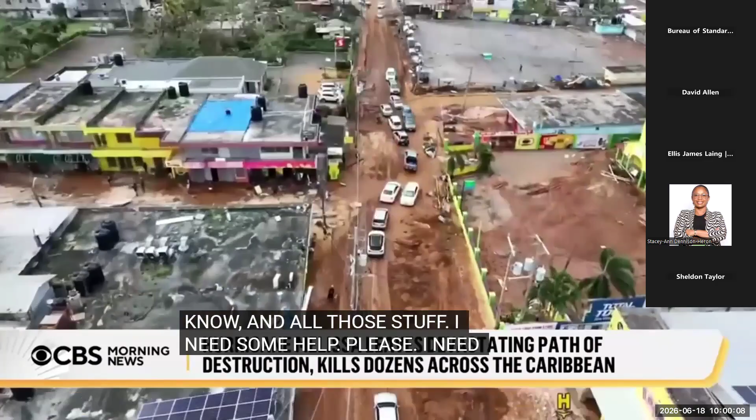Similar scenes playing out in eastern Cuba. People there combing through what's left after hurricane-force winds reduced homes and buildings to rubble, trying to salvage what they can, even in communities still completely flooded.

Back in Jamaica, we traveled to Santa Cruz, about 2 hours west of Kingston. The town's one working front-end loader shoved mud off the only major roadway connecting this community to hard-hit Black River.

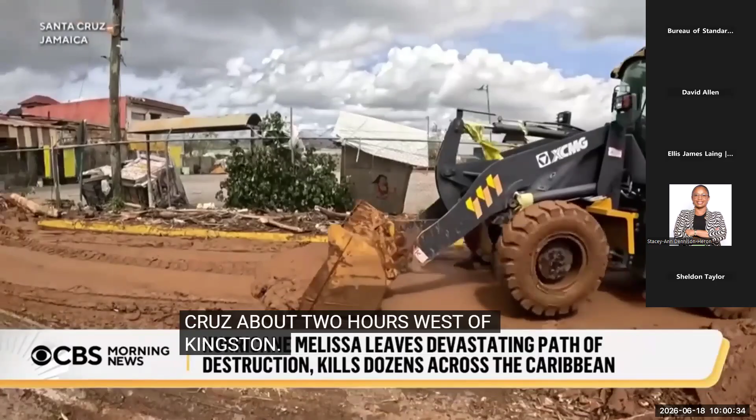Local politician Delroy Slowly: I drove around, and it's really a horrible thing. This is the strongest storm we've ever seen. But in all of it, we still have to give God thanks for it. It could have been worse.

How could this have been worse? Lives, many lives could have been lost. You see, properties can be replaced, but it's one life you have.

At St. Elizabeth Technical High School, the students and teachers sheltered in one of the concrete buildings on campus, but this is one of their classrooms. The roof ripped off in the winds, and the walls are all piled on top of the desks and chairs where students would have been sitting on a normal day.

While the school is in recovery mode for now, Principal Keith Wellington is determined to give his students the support they need. It's not even just about school and getting to do their exams, but the period of socialization, what they go through when they're at school with their friends. It helps them mentally, so it's important that we get back to some level of normalcy.

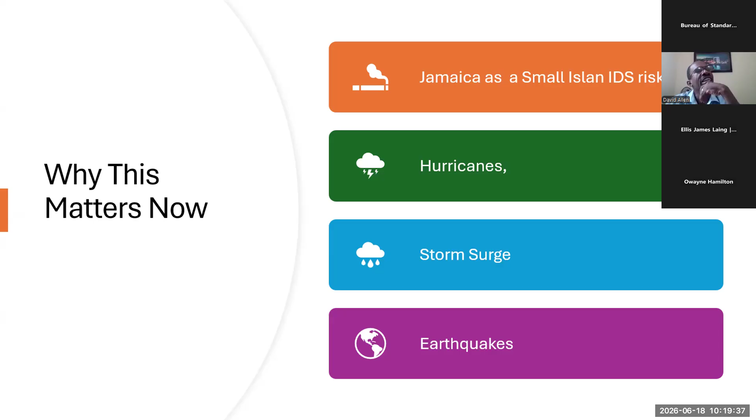But primarily, one of the things we face, especially on the heel of Melissa, is hurricanes. Hurricanes happen, but those of us in building practice know that though earthquakes are significant in our Jamaican space, the way we build, especially given concrete structures and low-rise concrete structures, means these structures survive pretty well under earthquakes. More than 90% of construction in the country is residential, and mostly not more than two stories high.

We have a practice in Jamaica of using a lot of concrete, maybe a lot of steel—we'll come to whether that amount of steel is necessary—but we're pretty good at using a lot of concrete. What we find is that in many cases, the structures that fail are structures that are not engineered, or have not had the input of design professionals.

So we have cost of compliance versus non-compliance. Compliance costs include proper construction, not necessarily more costly construction. Looking at compliance costs: upfront monetary outlays, a permit maybe $135 per square meter, give or take based on what the council charges. The design professional fee may be somewhere between 7 and 15% of construction costs. And if you're using high-grade material to meet standard, you want to resist winds of up to 150 miles per hour. In fact, today we have to be designing closer to 200 miles per hour.

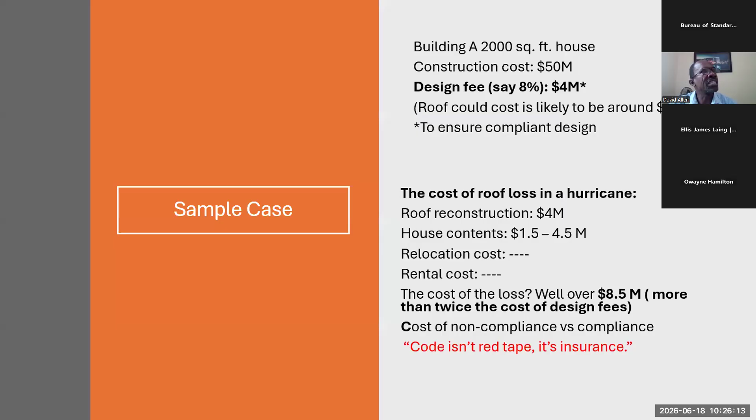And we see the rafters in place, so we know the rafters remain because they were strapped, by and large. So what is then missing? I wanted to emphasize this because in the Jamaican case, it's not so much that you have the rafters not being held down or the wall plates not being held down, because we have learned a lot from Gilbert.

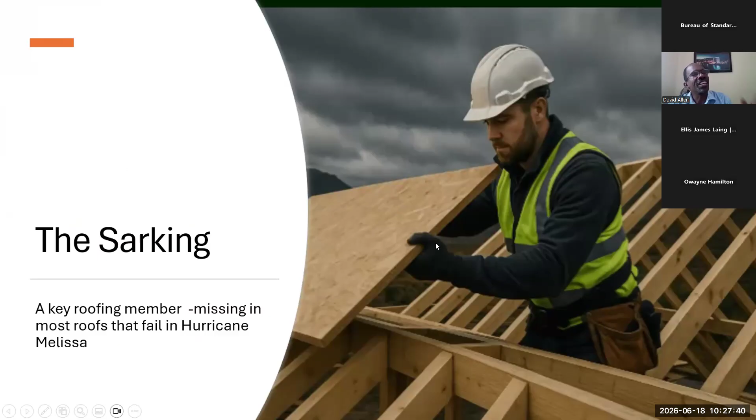And this is what the sarking will look like - not probably as smooth as this, but in the Jamaican context we use things we call tongue and groove boarding or T111, sheets that are placed atop the rafters, and then on top of that we put your purlins and then the roof sheet.

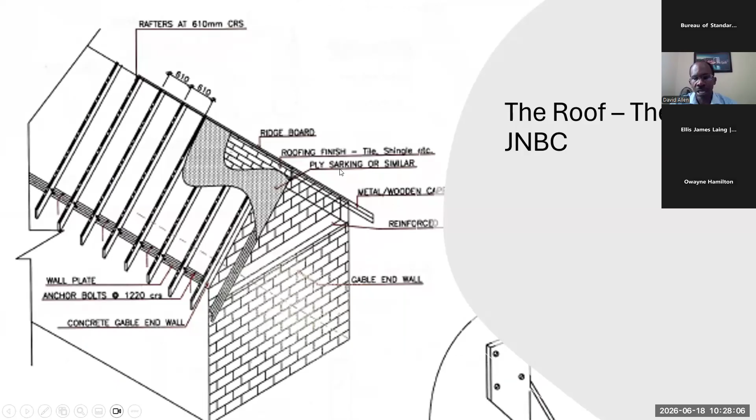So what's happening is that for a situation in Jamaica, from my findings, when you have that absent member called sarking, which is part of the code - so it's not something new you're putting in, it's already there. This is a snapshot from the small building residential code. It shows you this thing called ply sarking or similar, which is not done, clearly because it's going to cost some money.

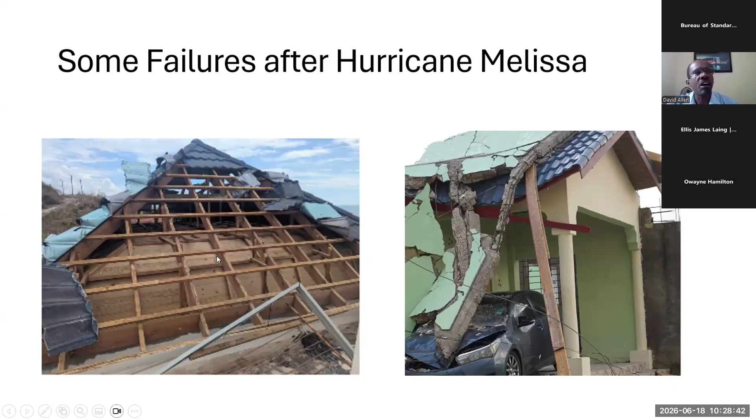But if that member were in place, you'll find that the sheeting would have a proper base to go on - yes, because it goes normally on top of these purlins. And the exposure to damage of your structure would not be as significant, because wind would not blow straight into the house, and water coming in during the hurricane event will not get in. Therefore your roof by and large will survive, even if you have stripping of the roof sheeting. So the structural detail is important.

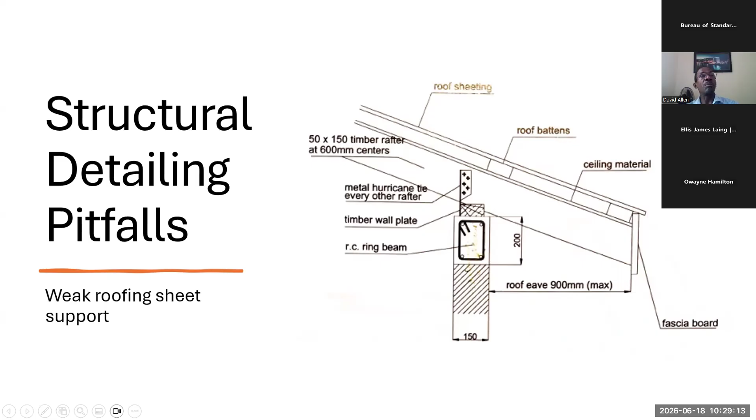A weak roofing sheet support is what I'm finding to be a major issue in the structure of roofs. Many of you may already know this when you look at the ring beam on top, the wall plate on top of that, the hurricane straps. But that member that normally goes just before the roof sheet, which is called a sarking, is in many cases, and in almost all the cases I've seen, absent. So applying the Jamaica National Building Code best practices is important.

I'm trying to keep with time as well. You want to follow a particular process, right?

The design is important. Under the Building Act, you may only be required to use an engineer when the structure is above 3,000 square feet, or roughly 300 square meters. So the structure may not have a design professional, but it's advisable. In many cases the councils have that duty as well, looking at the building and saying, no, it's still less than 3,000, but in our view this is going to need one. So practitioners must look for reasons, not undue ones, which will require the design professional to step in.

So you move from design, to the permit, to the construction phase, which is where you have quite a bit of inspection occurring. We want to suggest that some inspection happen at the roof level, because from my understanding, that's not where the municipalities typically come in. They want to see that the trench is dug and the reinforcements are put in place before the concrete is cast. They will come and look at the concrete roof, but I'm not sure what happens with timber roof situations, and I could be corrected on what level of scrutiny occurs there.

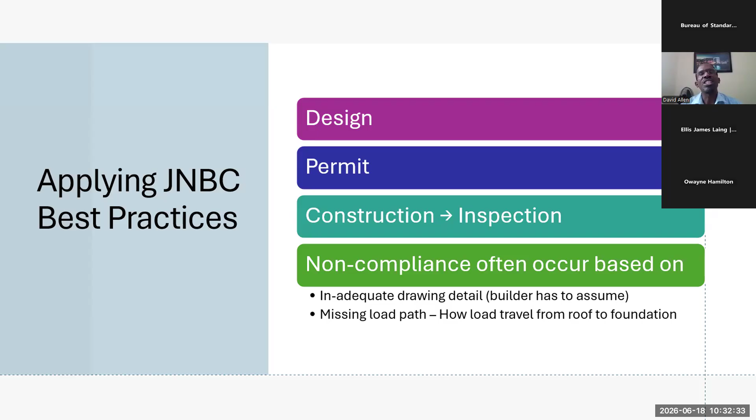Missing load path - when we talk about that, we mean the whole load transfer traveling from the roof to the foundation, and when we say missing, there are gaps. So the connections are important: the connection of the roof sheet to the purlins, the purlins to the rafters, the sarking to the rafters, and all those connections going down, so that the roof is connected to the wall and pinned down properly to the foundations.

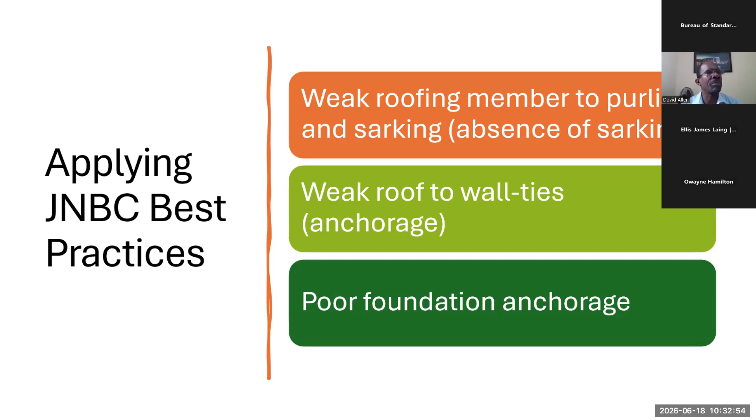All of those connection areas must be solid to avoid failure. So we start applying best practices. We need to address weak roof members - we're finding the absence of sarking. We have weak wall ties, though we are improving quite a bit in that area, and poor foundation anchorage, though I won't get into that detail.

What I want to end with is a kind of checklist for engineers, builders, and inspectors. It's important to ensure the load path is continuous, meaning there are no gaps, no breaks. In past times we may have found a gap where the rafter meets the wall plate, so we use hurricane straps to close that loop. But the loop we're not closing is the roofing sheet to the purlins, because the purlins, the sarking, are really basically absent.

We must ensure that the details match the drawing - this applies to builders, owners, and whoever is in charge of the construction process. If it's not in the drawing, don't build it. There's a common failure where contractors act as 'value engineers,' saying the engineer doesn't know what they're doing, that this is too much steel.

Or we can put that there, or stretch that a little bit, because in their experience they have built buildings that are okay, since they haven't heard that they collapse. So they find a way to cut down the cost. You tell the contractor, we want a 6-inch slab, can we go down to 5-inch, or want an 8-inch slab? They say, no man, this is foolishness, 8-inch of slab can't work. We will put it down to 6, and we save a lot of money. That's about a quarter of the whole cost already, or somewhere about there.

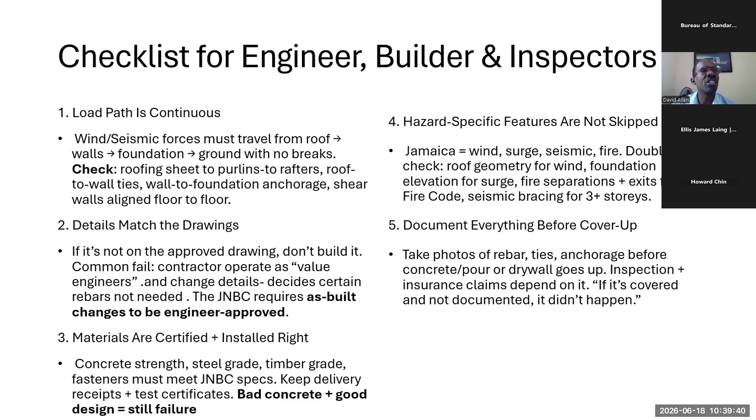Sometimes it's almost impossible to determine what was done before. So you really want to track the progress of the construction, whether it be inspectors, builders, engineers, or your own construction. As the owner, employer, or developer, you want to track the process. Also, not only to verify, but to also prove that what is built is according to plan and design, and therefore it is good for everybody to be assured of resilience. I'll stop right there, thank you.

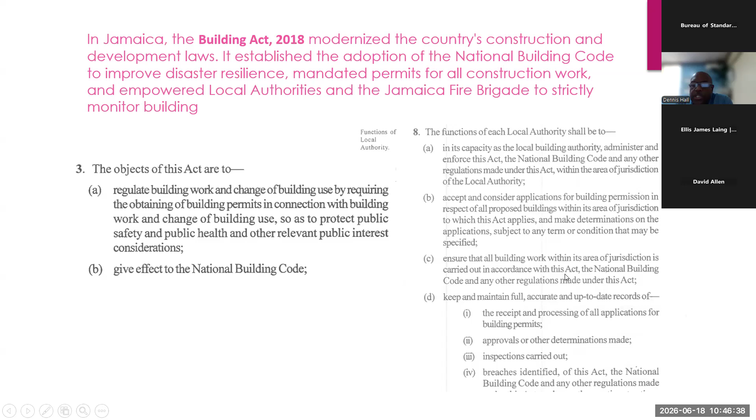Section 8 spoke about functions of each local authority, in its capacity as a local building authority, to administer and enforce this Act, the National Building Code, and any other regulation made under this Act within the area of jurisdiction of the local authority. This includes accepting and considering applications for building permission in respect of all proposed buildings within the jurisdiction, and ensuring building work within its area of jurisdiction is carried out in accordance with the Building Act. We can go on.

I'm just going to browse through some of the sections. So what is building work? Some persons feel that if they are doing an addition inside the house, or doing it within one floor, they don't need a permit. Well, this is saying something different. Building work means the design, construction, erection, alteration, repair, extension, modification, demolition, or removal of a building, and all activities relating thereto. So you really don't have an excuse not to submit a plan.

It says building means a domestic building, a public building, a building of a warehouse class, and any other physical structure, whether temporary or not. I'm going to emphasize temporary, because the gentleman I mentioned earlier did say his structure was just temporary. So right here we're seeing clearly that you need a permit for any part of the structure and any architectural or engineering product or work erected or constructed on, over, or under land or the sea, or other body of water. That simply means if you're going to excavate, you're going to need a permit. If you're going to go above the land, suspended the building, you're also going to need a permit.

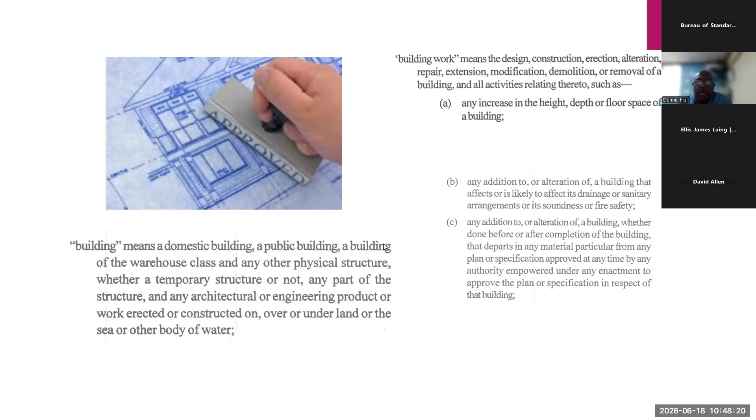I'm running up to Section 17 of the Act. A person shall not carry out building works unless a building permit in respect of the building work has been issued to him. I think that is straightforward. And part B spoke about, where applicable, a planning permit having been issued to him under the TCPA, that is by NEPA. So it's clear right here that a building permit is critical.

Section 18 spoke about a person who proposes to carry out building work shall apply in the prescribed form and manner to the local authority. If you're unaware, what we have at the local authorities, KSAC including the other parishes, are application forms that you are required to fill out with some other statutory documentation - titles, survey ID report, and property taxes - that you will need to supply us with when you're applying for a building permit.

Section 28, the local authority may suspend a building permit, and it tells you why we may suspend it: if the permit holder has failed to pay any fee or other charge required by this Act, the National Building Code, or any other regulation, or the permit holder is in breach of any provision of this Act. So this is telling you that even though you have a permit, we can also rescind it if necessary - that is, if you breach any form of the permit, if you are building in contravention of what you got approval for.

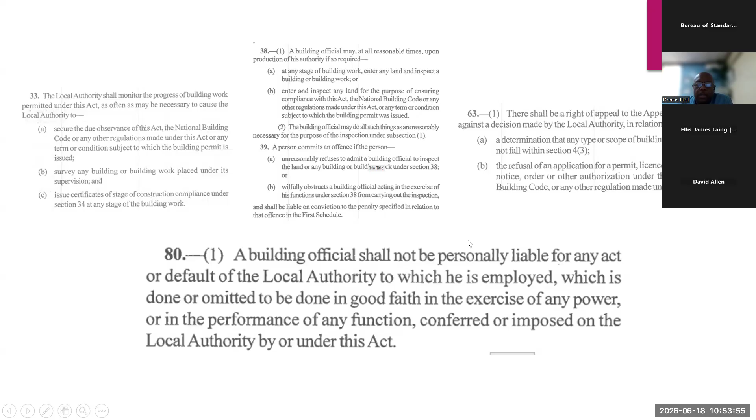I'll end the regulation aspect with Section 80 of the Act: a building official shall not be personally liable for any act or default of the local authority to which he is employed, which is done or omitted in good faith in the exercise of any power. So this is just saying we are human and might make a mistake, and we're not totally liable if we can resolve the issue through the same tribunal I mentioned.

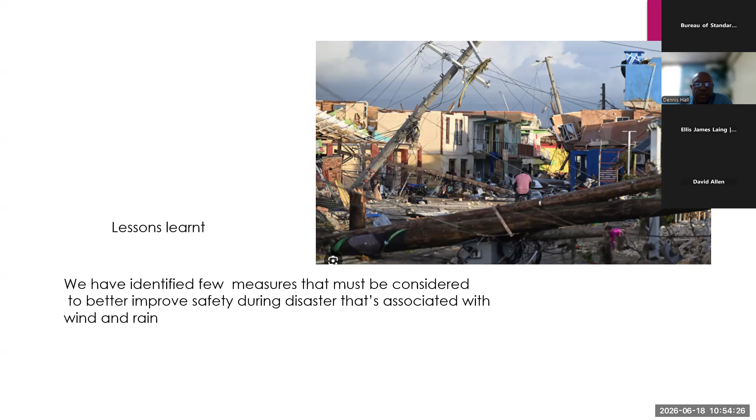So I've dealt with a bit of the regulation in the first part, and now I'm going to look at some of the lessons learned and what we can do to make buildings safer. We've identified a few issues—Mr. Allen had gone through foundations, walls, and roof, and we believe he is right on point.

One of the first things we want to look at is buildings in low-lying areas and the floor level. The building code will tell you that you can go a minimum of 150 millimeters above the grade.

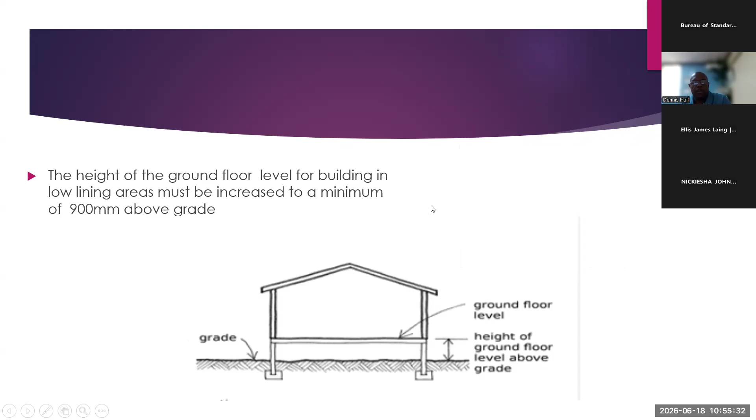But if you are in a low-lying area, we are definitely going to recommend that you go a minimum of 900 millimeters above the grade. In areas in Kingston like New Haven and other areas close to the seaside, we recommend a minimum of 900 millimeters, which provides a level of retention time, hoping the water will subside and recede, giving them a little more space or time to stay in the dwelling.

The other thing I want to look at is the roof. Mr. Allen spoke about this and the socking. But what I believe is a type of disaster—I'll call it that for the purpose of discussion—is termite infestation. We have looked at flooding, wind, and other types of disasters, but we have not looked at termites.

Mr. Allen spoke about the hold-down bolt on the wall plate, and I'm identifying this on the screen. This is the wall plate here, and the hold-down bolt is normally placed every 24 or 36 inches, about 900 millimeters. Now, if termites get into the board, into the wall plate, and destroy it, whenever the wind comes you won't have a roof, because the wall plate is what really anchors the rafters.

And so often, whenever we cut the wall plate or any timber at all, the timbers are normally treated, but if you cut the timber you expose the end of it. So you'll need to retreat that area—cutting the wall plate and leaving it exposes it to termites.

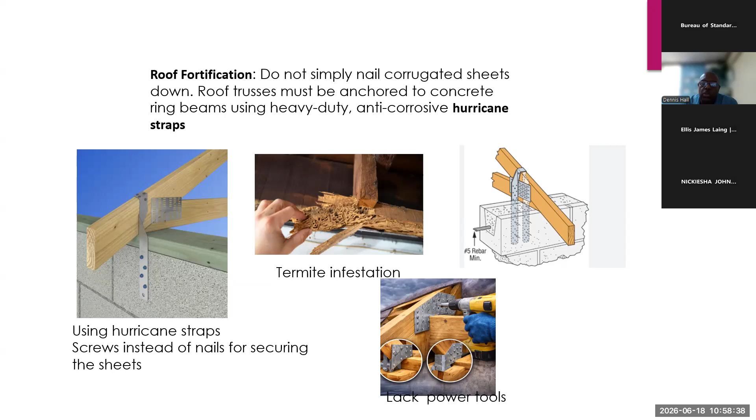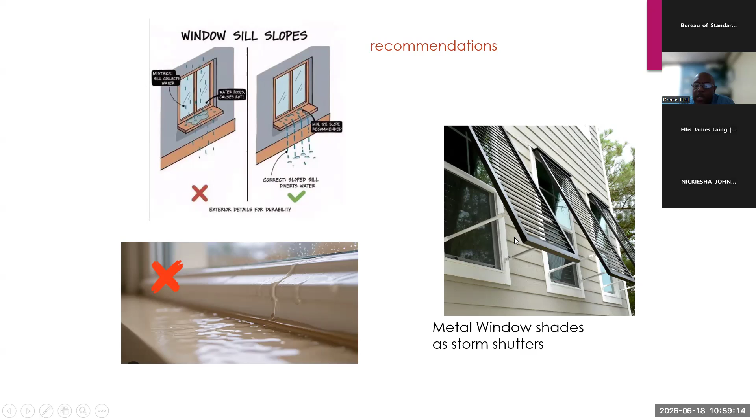Just two slides to go. I also want to look at window sills, where a lot of buildings, especially where the sill of the window is not properly designed, water can get underneath the sill, pass the sealant, and get inside. So we're recommending that they modify the sill somehow to get the water out. We're also recommending the use of metal window shades, which can serve as window shutters.

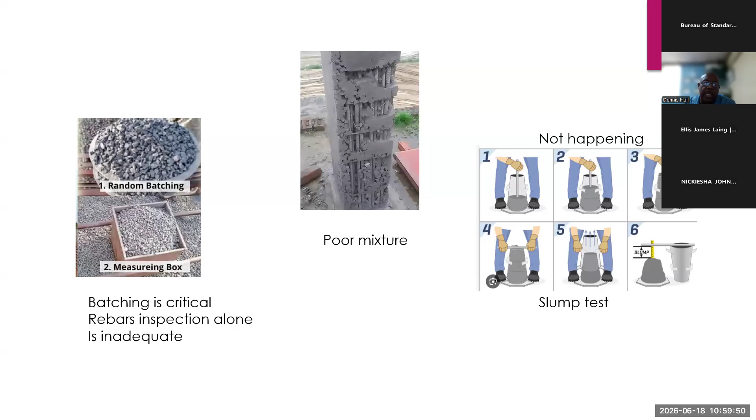And finally, critical to the industry, the batching - we spoke about that earlier - where we're making the concrete soupy, and we're not seeing slump tests being done on many sites. There are times when we end up with a lot of honeycombing that can result from poor mixtures as well, and no vibration. So we believe that batching is critical, and that's something we need to play a more pivotal role in for the built industry.

And that's the end of my presentation.

Mr. Hall, thank you very much for bringing some of those things to the fore. An important point you've shared is that so many contractors come to the fore, sometimes in the face of disaster, and in the absence of technical competence in areas, some people just assume the role. And some of these persons now need to be brought into the fold. So thank you very much for that presentation.

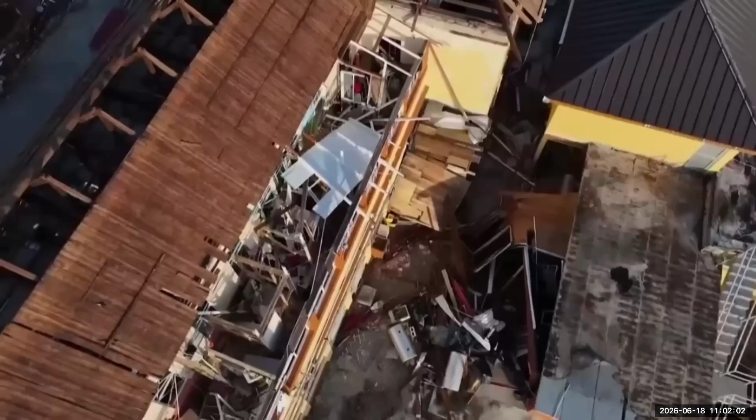It's crazy. The town's hospital had part of its roof peeled off by the storm. It is still just functioning, staff having done their best to keep their patients safe. We had to carry them to the top floor, which essentially caved in, so we had to move them back to the ground floor. In the accident and emergency area, it started flooding, so we had to be there pushing out the water.

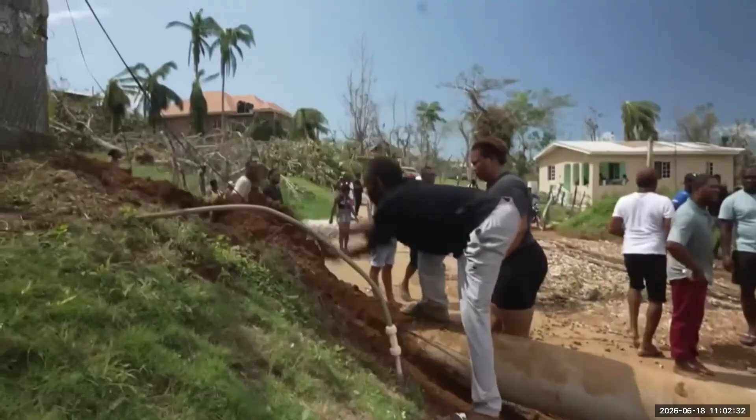No way forward? Just getting to the areas worst hit is an effort in itself. More than 100 roads blocked, communications hit hard. The fear is that the death toll will rise further as authorities reach more cut-off areas.

In Santa Cruz, inland from Black River, Sonia is doing what little she can to recover her livelihood, drying out storm-damaged stock from her shop. But the roof is missing, and she doesn't have the money to get it replaced.

I feel cast down, discouraged, like I would have just given it up. But I still doing what I can do. I don't know, I'm just trying.

It's terrible, it's terrible, everything gone. People here are used to the ravages of hurricane season, but those hurricanes are now being fueled by a warming Caribbean Sea. As Jamaicans start to recover from the strongest storm in their country's history, the fear is they may not have to wait too long for one stronger still.

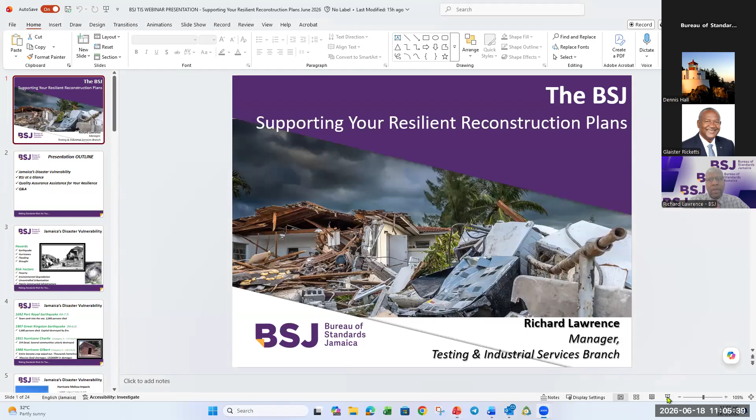Thank you very much, Ellis. Good morning, everyone. You have heard the requirements of the building code. You have heard the requirements of the municipal authority, and those are mandatory requirements. But how do you meet them? That is where the Bureau of Standards comes into play. I'm here to share with you what we do to support you in recovering and being resilient.

So in my presentation today, I'm going to look at the vulnerability that Jamaica has for disaster, the Bureau at a glance, and our quality assurance assistance that we have for your resilience.

Now, Jamaica is an island affected by numerous disasters: earthquakes, hurricanes, flooding, drought, and it is compounded by the fact of large areas of poverty. There's environmental degradation, movement to urban areas, and as we heard from the two previous speakers, some poorly constructed infrastructure. Some of it is through squatting.

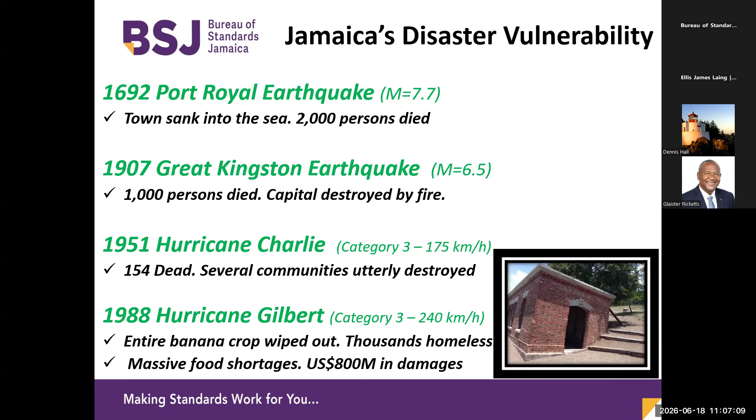And over time, we have seen some significant disasters affecting Jamaica: the Port Royal earthquake back in 1692, the Kingston earthquake in 1907 — I have to say that because some of us are born in the 1900s — and Hurricane Gilbert in '88 that cost us over $800 million in damages.

And in recent time, we had Hurricane Melissa in October last year that affected us to the tune of over $8.8 billion, or 41% of our GDP. So Jamaica is no stranger to disaster, and it's important that we are resilient.

Resilience is not an option. With all of these disasters over the years, and now being in the hurricane season for 2026, what do we do to prepare going forward? My suggestion: partner with the Bureau of Standards Jamaica. And why do I say partner? Because we are here to help.

This is a major news alert. Breaking news, breaking news: the BSJ is not a regulator. If you knew this, put a 1 in the chat — that the Bureau of Standards Jamaica is no longer a regulator. Let me see the ones in the chat. Yes, we're not a regulator. We were, but we're no longer.

What we do is facilitate trade, and we assist in business development through our core functions: conformity assessment, which includes certification, sampling, and testing. We develop standards and codes of practice like the building code. And we also offer services in metrology, industrial and scientific, which includes calibration.

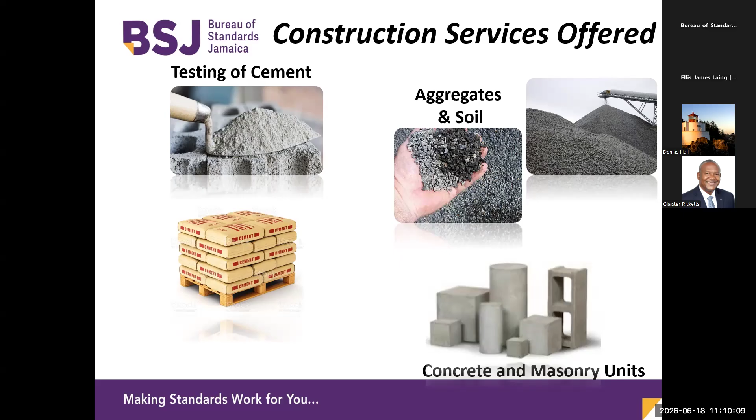I'm going to go into some more detail on the services that we offer. You heard Dennis speak earlier about new building systems coming to Jamaica. And I can tell you, I've been at the Bureau for more than 2 decades, and I've seen new ideas of construction from all over the world over the last 20 years.

What we do under the Building Act is provide an evaluation of these proposed building systems to be used in Jamaica, to see if they meet the building code. If they're not meeting the building code, you can't use them in Jamaica. The building systems might have some compliance issues that need to be corrected before implementation, so we provide that assessment. Persons who want to use a building system from whichever part of the world in Jamaica — we provide a service that can help determine whether the system can be used here based on the building code requirements.

There is a desire for us to have all construction labs in Jamaica accredited. We are here to help. We're not going to brag and say we're the only one and want it to stay that way indefinitely. No, we want every construction lab to be accredited. Right now, accreditation is voluntary. We have opted to go to the very highest level of international recognition for our labs. We think it's very important, and we're encouraging other labs to come on board.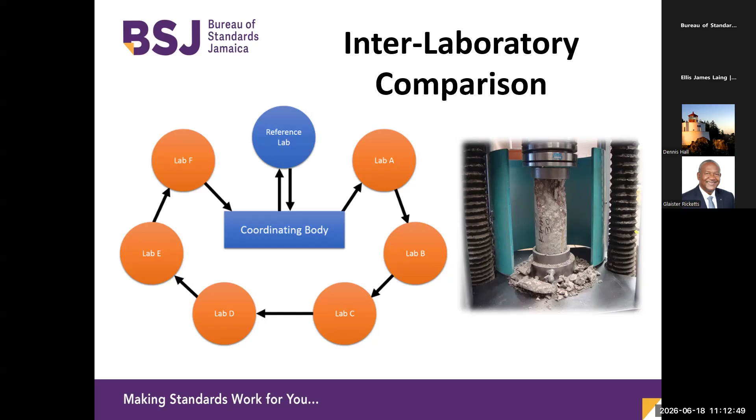We offer quality assurance for construction projects in general. So if you have construction already up and the municipal authority wants to know whether you have test results for this column or beam that's already up, we can do non-destructive testing. We can look at your various components, your slab, your beams, your column, and do an indicative test to see the strength of the concrete. Now this is not just for construction sites with new elements. You might have a home and want to build upstairs, and you're not sure if it can take the load for a second story.

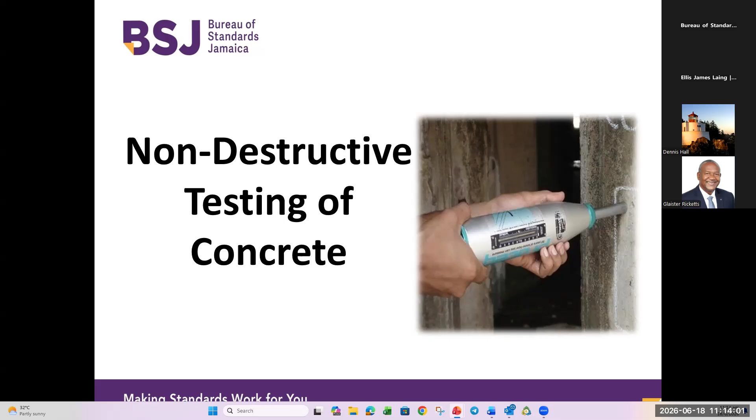Talk to us, because our service is not only for the big private companies, it is for the small homeowners too. We do non-destructive tests, we do on-site testing of concrete at whatever scale - a multi-story hotel building or an extension to your bedroom. We can come on site and do the slump tests, your concrete tests, compressive strength tests, so that you can have confidence in what is going into your structure.

And we are available not just to do the entire test, but we can do parallel tests. So you might have already engaged another lab, no problem. But given that we are operating at the highest level in Jamaica and the Caribbean, you might want to speak to us, and we can do parallel testing just to check that whatever service you're getting outside of this accredited lab is meeting up to your requirement. So we do parallel tests. We can test one in ten of the trucks coming on your site if that is what you desire.

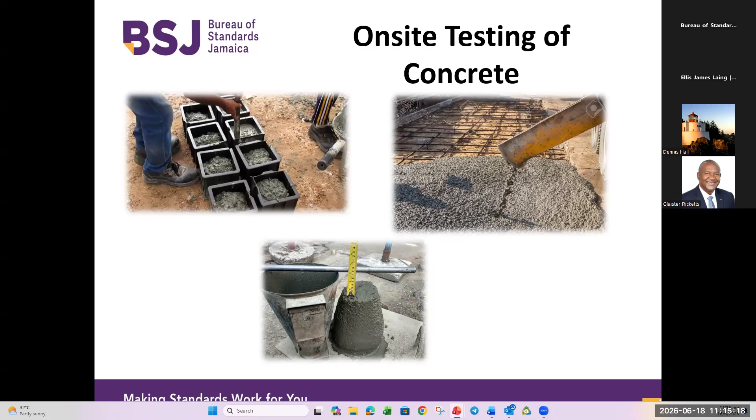There is a skill that comes into designing concrete. David is a lecturer at UTech, and he lectures his engineering students on concrete mix design. It is not always easy to get it perfect. Our laboratories offer a service where, if you know what you want and know where you're getting your aggregates from, you can speak to us and we can design the concrete for the structure you're putting up - whether it's a large or small structure. We're not only doing a mix design on paper, but doing the tests to support the mix design. So say you want a 3000 PSI concrete, and you do a mix design based on what you learned in school - we can do the tests to support your design on paper, or we can do the design for you. Given that our mantra is making standards work for you, we will put it together so that you can have a mix design you're confident in.

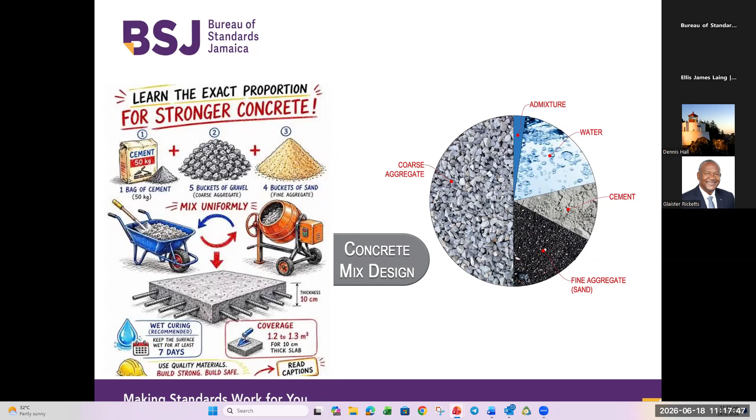Because, for instance, aggregate from Clarendon might be different from aggregate from St. Thomas. So on paper, your mix design for aggregates from Clarendon or May Pen might have the same numerical value, but the aggregate coming from Yallahs is slightly different. So we're able to take that headache and uncertainty out of your design. And as I said, it can be a small project - you're extending your driveway, putting on a patio, or building a bridge. The Bureau of Standards has been mandated by the government of Jamaica to provide all citizens of Jamaica, all companies in Jamaica, this quality assurance support.

There is a new program that came into place after we gave our guns up. When we stopped being a regulator, we turned to becoming a facilitator, a helper. And we help all industry, including block makers.

Many block makers don't have the infrastructure to do the tests on their blocks. So we provide a service where a block maker who just gets a hand mold and is in Rockfort, working out of the backyard, can bring 2 or 3 blocks to us. And we can do the test to see if these blocks, before they go to the market, meet the requirement of JS35, which is the standard for hollow concrete blocks.

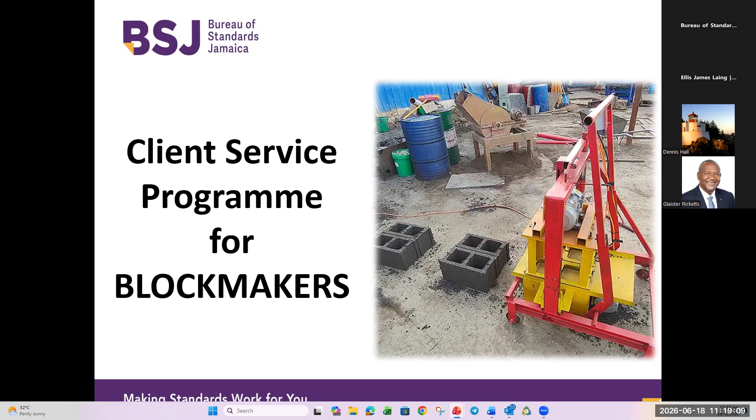So we provide a service where, through the client service program, you can get consultation free of cost to design your mix. We can look on the aggregates, see the proportions, and give you advice. We can also provide tests before you go to mass production of your blocks.

Another service we provide is customer complaint investigation. We have had complaints over time that persons order concrete or ask a contractor to build a structure and they're not getting value for money. We can come on site and do investigation based on what you are seeing on the ground, so you might see cracks.

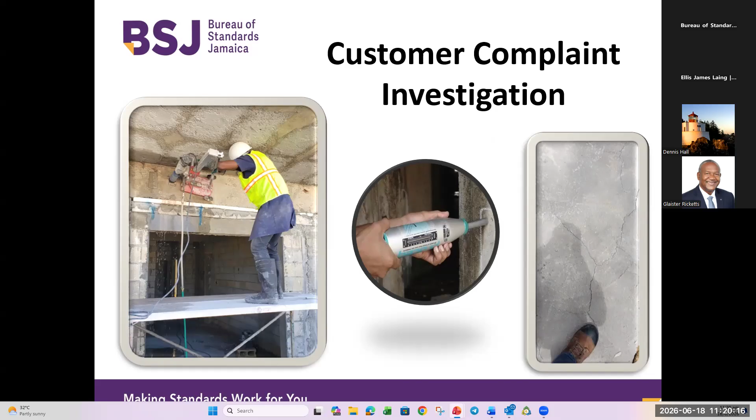We can do non-destructive tests, visual inspection, and we can cut cores out of the concrete and do tests on them to see if the strength of concrete that you paid for, that was promised to you by the supplier, that you had all intention to use for your structure, is actually so. So we do complaint investigation to see if what is there is what is agreed in your contract.

There are persons working on site who don't have the requisite skill set to operate at the highest level. We train construction personnel. We have done it in the past, and this is a service that is being rolled out right across the board.

Use our services. I must confess, I've seen some samples come to our lab for testing from people who should know how to make a concrete cube, and if they were in David's class, they would get a big failure. Those samples are being used to determine the strength of a member. It is very dangerous. So we offer training to personnel.

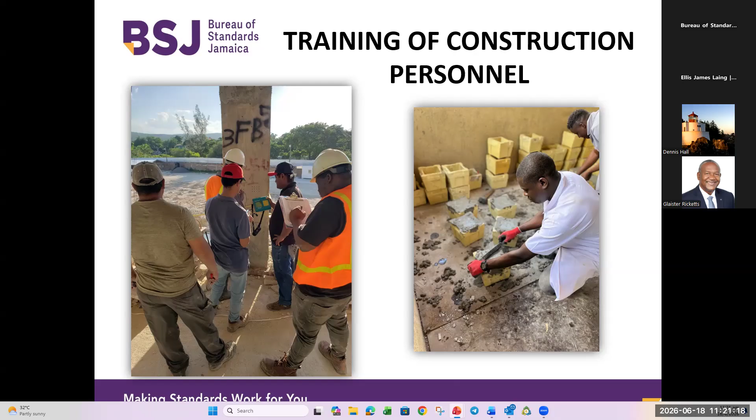We want to create a culture of quality in Jamaica. We want to say to all Jamaicans, only buy from approved makers of blocks, approved providers of aggregates and steel, whatever building material. If you're not sure, ask us, call us.

We have a culture in Jamaica where we look on the bottom line first, second and third before we look on quality. We can't do that. Hurricane Melissa just told us that when you skim from up front on the bottom line, it's going to cost you significantly down the road, whether in your recurring costs or even loss of life. So we are partnering to create a culture of quality.

Test the building components. Design with the building code. The building codes are available. The Bureau of Standards provides the codes. You can come to our library.

We have a fancy name for our library, Technical Information Center, because, you know, we can't call it library. But you can come and look on the code before you go into your design. If you need to purchase the code, you can go online and buy them. You can ask us to come and help you with your inspection before you rebuild, to know if that crack is going to affect what you need to do in your rebuilding effort. Talk to us, let us come and take a look.